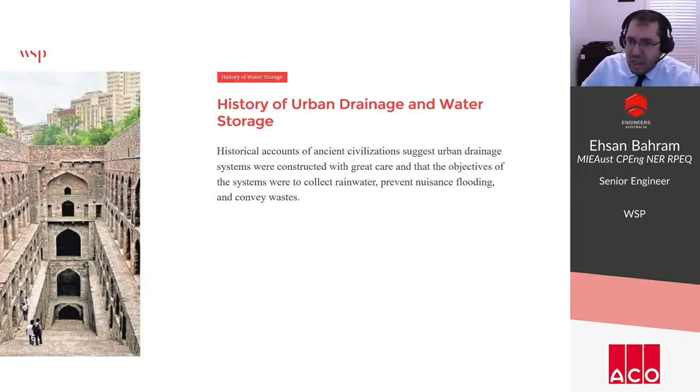History of water storage. As I was going through to get some resources for this, I was actually very amazed. We have a very long history of drainage and water storage. Lots of historical ancient civilizations developed sophisticated engineering drainage infrastructure and storage throughout history. So I'm just going to go through a couple of them quickly.

The Indus civilization in India had lots and lots of complex open channels constructed in the center of the street. The Persians, because it was an arid area, had lots of urban drainage systems as well. They actually enacted laws to protect it from pollution, which was very impressive. The Roman Empire had significant urban drainage, road drainage, and construction of large underground conduits, and they were pretty advanced on that.

The Inca terraces - this actually came from our technical director, and I didn't know about this - these civilizations in South America had these very massive terraces. They used it for land farming, but also to help against erosion, and because they received lots of rainwater there, the subsurface of the terraces was a very well planned engineering system. Just like us, for water infiltration they had soil, fine sand, gravels and medium gravels. So that was very interesting for me.

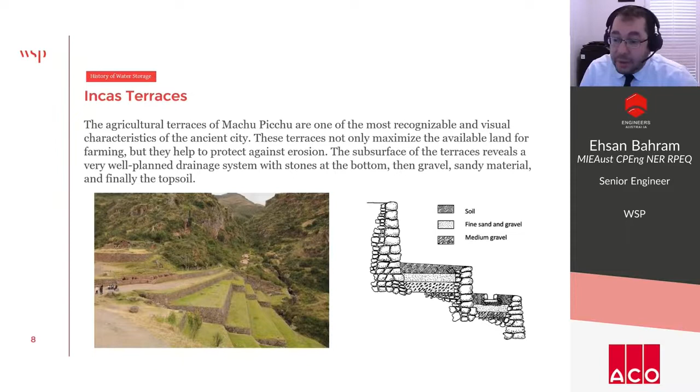So we move on to the next bit, which is the evolution of design. I just want to speak a little bit about when this was started 30, 40 years ago.

There was this pre-development versus post-development. In pre-development, with a natural catchment, we have a bit of rainfall, a bit of evaporation, a bit of runoff, and lots of infiltration. As we developed that catchment into urban development, cities, and urban infrastructure, we still receive a bit of rain, and now climate change a bit more. There is still evaporation, but as you can see, infiltration has been reduced significantly, and instead we have lots of runoff. If you look at this hydrograph, the post-development hydrograph versus the pre-development hydrograph, we can see post-development has increased significantly.

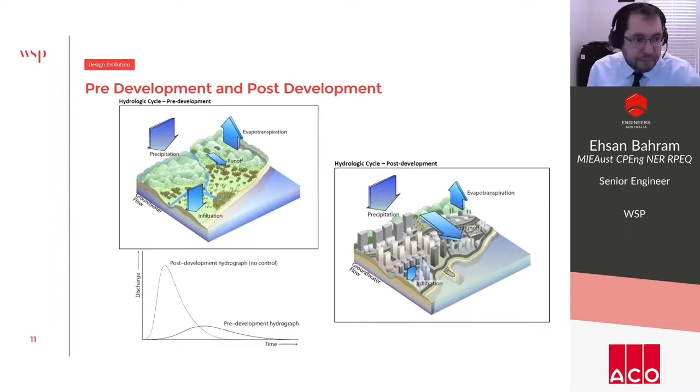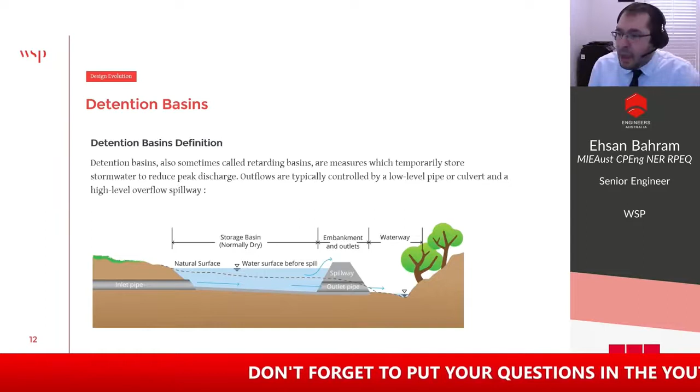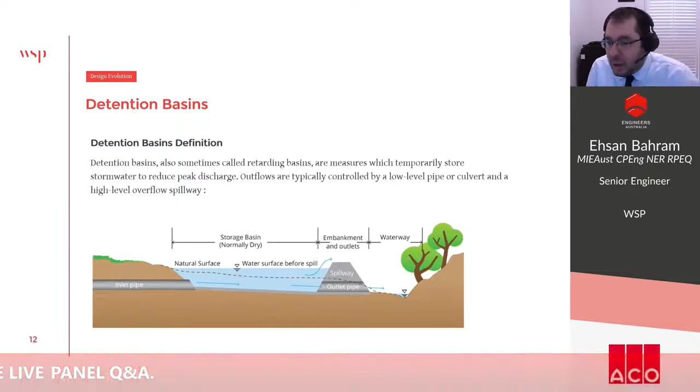To control this, we came up with a couple of ideas, and the most popular was detention basins. This definition is from the Urban Storm Drainage book: detention basins, also sometimes called retarding basins, are measures which temporarily store stormwater to reduce peak discharge. Outflows are typically controlled by a low-level pipe, orifice, or culvert, and a high-level overflow spillway for events higher than 1% AEP.

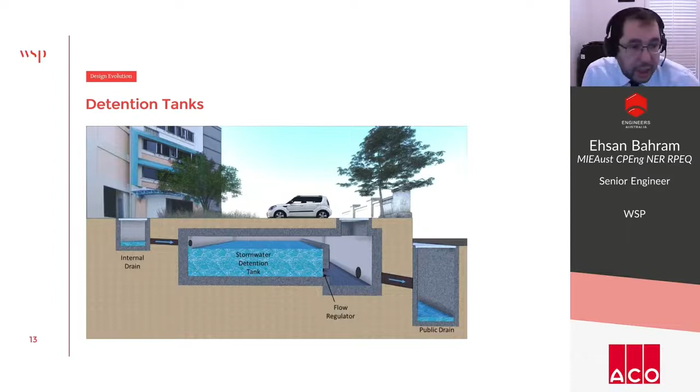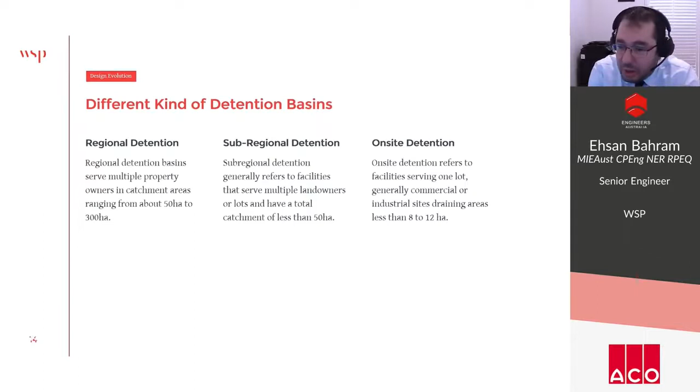And of course there are detention tanks, usually above ground or underground - both very popular, but it's just about storing that volume of water and releasing it gradually into our public drainage. Then we come to different kinds of detention basins: regional detention, which serves multiple properties; sub-regional, which has facilities that serve multiple landowners; and on-site detention, which generally serves one lot or a couple of commercial or industrial sites.

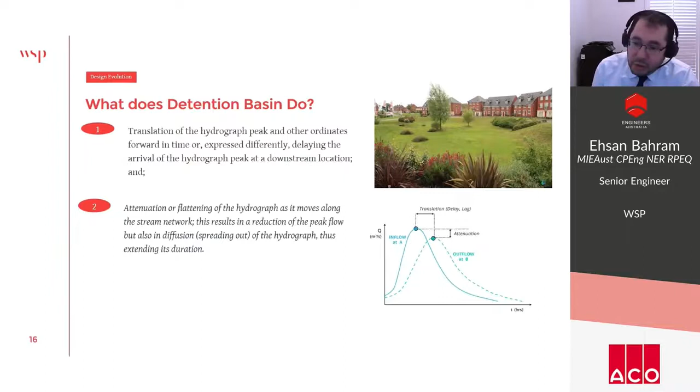So what does the detention basin do? In simple words, it reduces the peak hydrograph and it delays the hydrograph. So we are gradually releasing water in a controlled manner to reduce and delay the peak hydrograph.

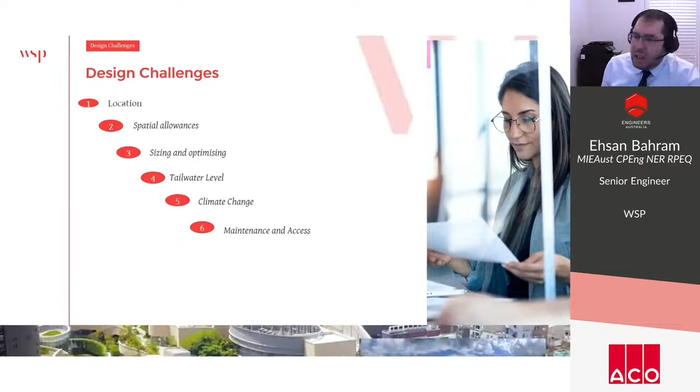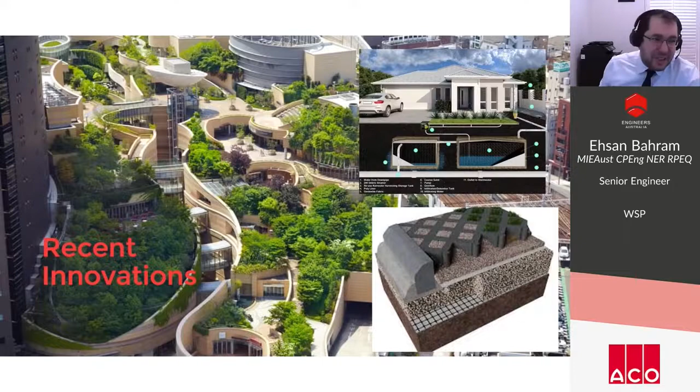Next, we needed a bit more innovation, so this is where recent innovations come into place. What do we actually want in an innovative design? We want it to be safe, environmentally friendly, we want to reduce the cost, we want it to be hydraulically efficient, easy to maintain, and of course we want to improve water quality, which is very important for us.

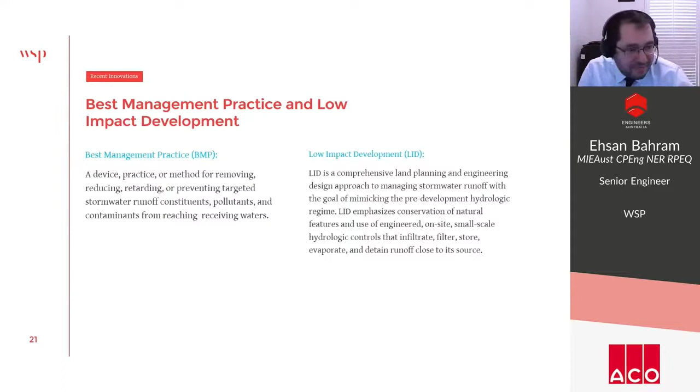Some of the key LID techniques here: conserve existing amenities. So if you have an old tree, a green area, park, land, or natural pond, we are aiming to conserve that. Minimizing impact, we try not to disturb the catchment as much as possible with cut and fill, regrading, so we just want to keep things as natural as possible.

Permeable pavement has come into picture pretty much in recent years. Green roofs, minimize directly connected impervious areas, like you probably have seen some grass buffers, grass swales, and rain gardens, of course. So these are the key low impact development techniques that we are after in terms of stormwater drainage.

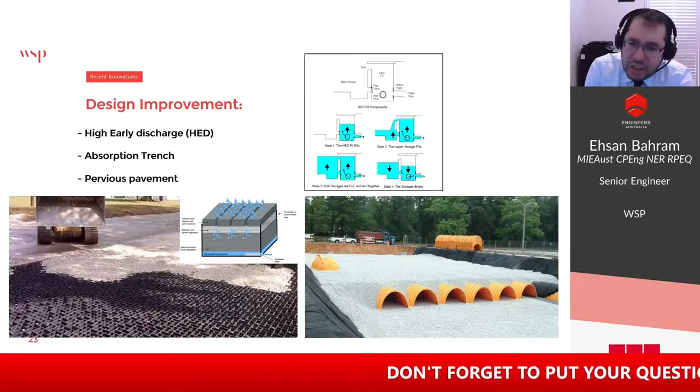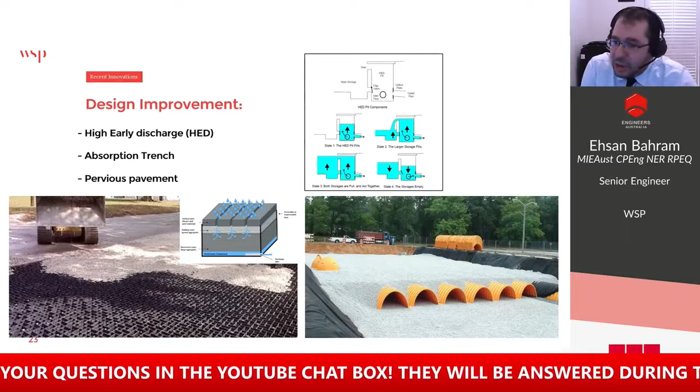There were a couple of design improvements as well. We have introduced high early discharge. That's just like a little small detention inside the detention to get that head over the orifice, so we can use the full capacity of that pipe or the orifice.

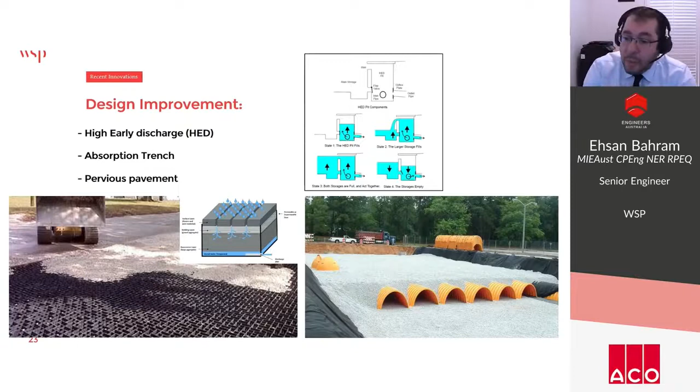Absorption trenches are now popular. Of course, you have to look for the site conditions - you can't have it on any soil, you just have to have a soil with a high permeability. Pervious pavement, again, it's a very popular technique. These all have pros and cons, so you have to analyze the site condition before incorporating them.

Geocellular models, modules, they come into picture. I'm pretty sure John will explain to us a bit in a moment. These geocellular, they're just honeycomb structures that are used to store water in urban areas.

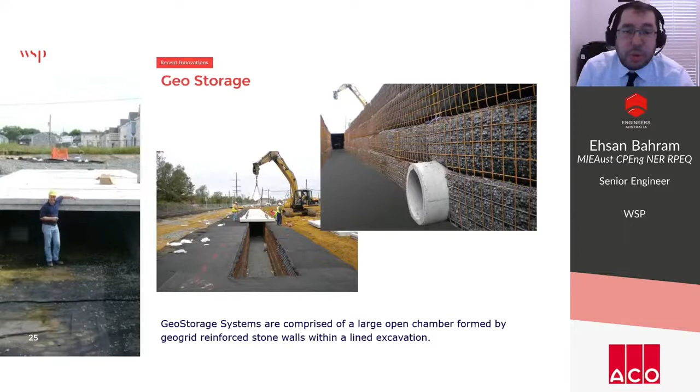We have geo-storage. That's another innovation that we had in recent years that comprises a large open chamber formed by geogrid reinforced structures. This is a good option as well because it improves water quality. So this is another option which can be used.

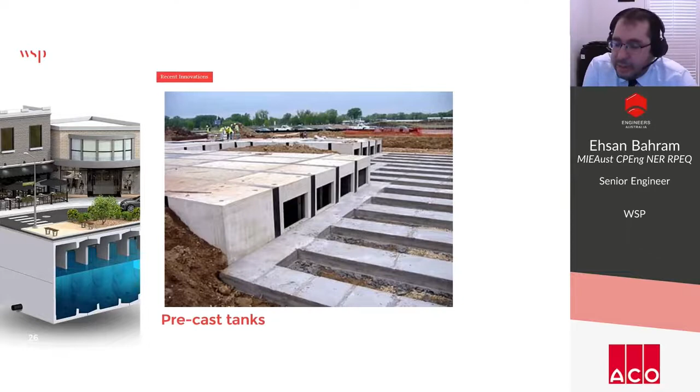And then we have these precast tanks, or they call it storm traps. When time is a constraint, these are very popular because they can install them very quickly. So this is a good option as well.

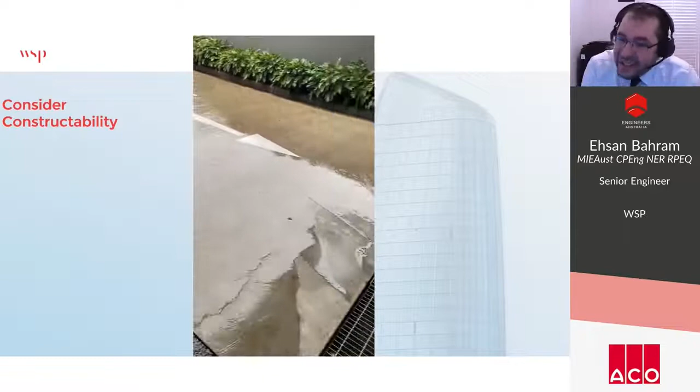What else do we have? Yeah, as we're getting toward the end of the presentation, I just wanted to share this. I took my car for the service the other day, and it was raining. This is the driveway entry to the repair shop. So if I play this, you can see that there is water coming in, and there is a grated drain here, but it's not capturing any water, right?

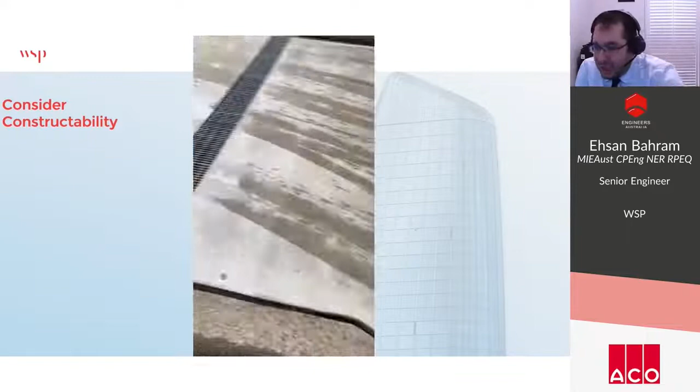So all of this I wanted to emphasize is that we need to consider constructability. What we see in the drawing is not what's happening in reality, and you can see the water escaped from this curb and gutter, and it's captured downstream somehow, but this grated drain doesn't do anything. So whenever we're doing the design, we always need to consider constructability as well.

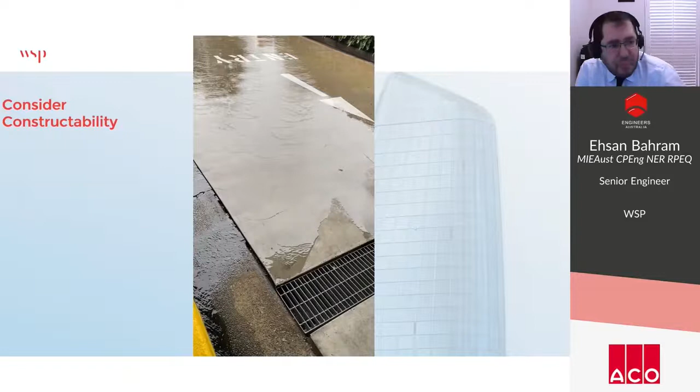So that was just an interesting thing I came across, so I just wanted to share with you.

Underground tanks are used in lots of projects as councils legislate to protect their downstream waterways and infrastructure. Managing both the quantity and quality of water being discharged off a site is only going to grow in importance, particularly as cities urbanize and rainfall events intensify as the climate changes.

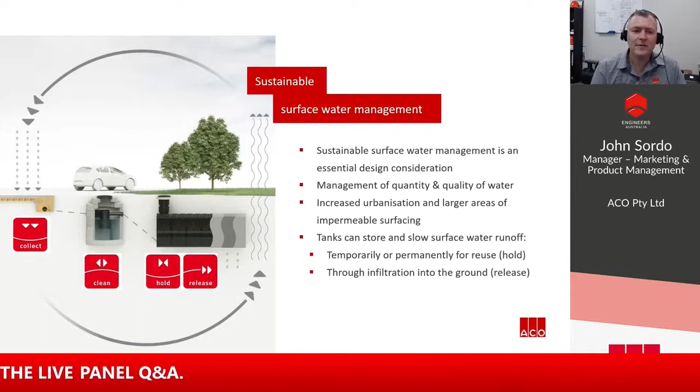These days, larger areas of the built environment are being covered by impermeable surfaces, which increases the risk of flooding. Tank solutions are a conventional way to store and slow down the surface water runoff to pre-development rates, as well as replenish the groundwater at a more natural rate.

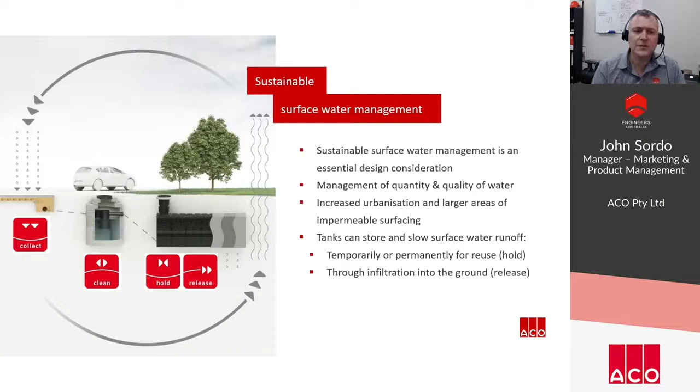These are the system elements that are designed to work with the natural water cycle. On a slab, drains are typically positioned to intercept or collect stormwater runoff, which is then treated or cleaned to prevent clogging or contamination downstream.

As you can see on the image, there are a number of tank solutions available to engineers and urban designers, both natural or engineered structures. Some of the engineered tank solutions include cast-in-place, precast concrete tanks, arches, and plastic structures. We'll focus today on just plastic stormwater tanks.

These can be easily integrated in a stormwater management plan for the infiltration, retention, or detention of surface water runoff.

Detention systems, also known as attenuation systems, are designed to spread the peak flow of a storm event. It does this by holding and releasing stormwater slowly. The idea is by controlling the runoff to reduce the risk of flooding downstream from a development.

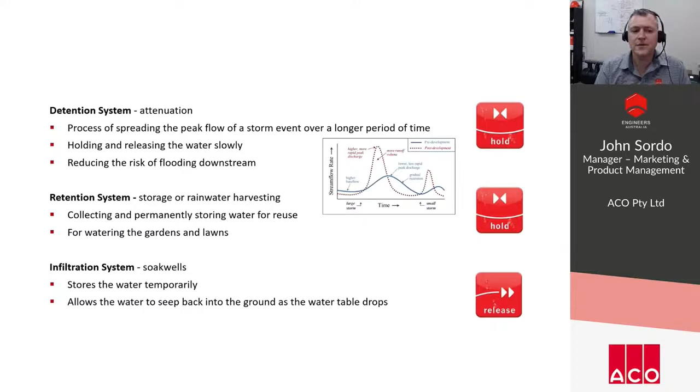A retention system collects and stores water permanently for reuse, for example, to water things like landscape areas. Infiltration systems or soak wells are used a lot in sandy areas to temporarily store water to allow it to naturally seep back into the ground to replenish a dropping water table.

To illustrate this, retention and infiltration are two common adaptations of these tanks to make best use of captured stormwater. Retention for irrigation or reuse purposes, infiltration where the soil can naturally free the water from its impurities. In both cases, the water is used at or close to the source of collection without it flowing through to any downstream infrastructure or receiving waterway.

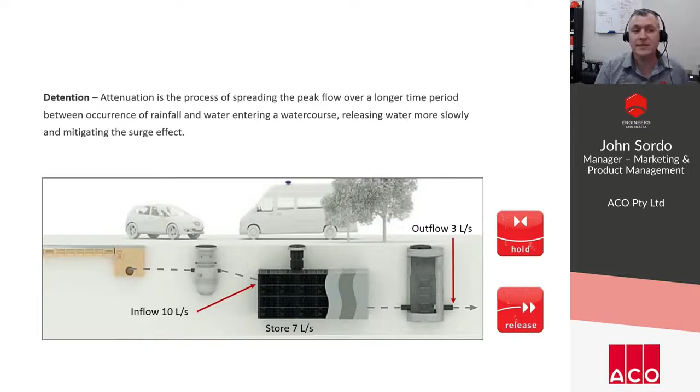But if discharging into downstream infrastructure is the objective, then detention gives designers the greatest control over the quantity of water to enter it. In very simple terms, it's an easy calculation.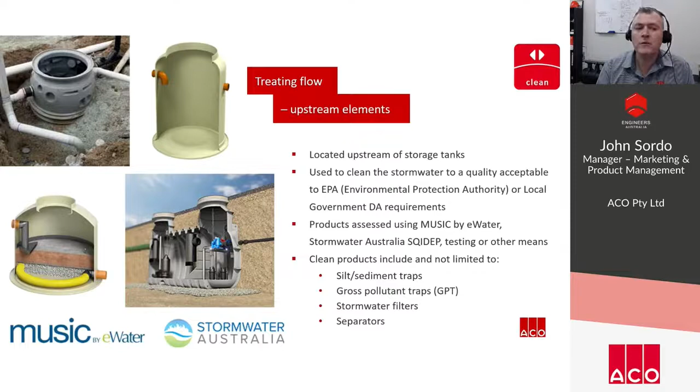Before I go on, I want to make special mention of two types of hydraulic control structures. The first are stormwater treatment devices. These are located upstream of the tank, with their performance being individually assessed and governed by the EPA and local DA requirements. Depending on project requirements, there are many types, from gross pollutant or silt traps, stormwater filters, or even light oil separators where hydrocarbons exist.

The other type of hydraulic structure are flow control devices, which control the release of water to prescribed rates downstream of the tank. These are typically installed in chambers with either purpose-designed mechanisms or just a conventional orifice plate. Now, both these hydraulic control structures are not the topic of today's presentation, but I want to mention them as they are essential elements that affect the quality and quantity of water being discharged off the site.

I want to go back to this slide to give an overview of the storage options available. From the top, we've got a detention basin. You often see these used in low to medium density areas. They tend to take up space that could otherwise be used for urban or commercial development.

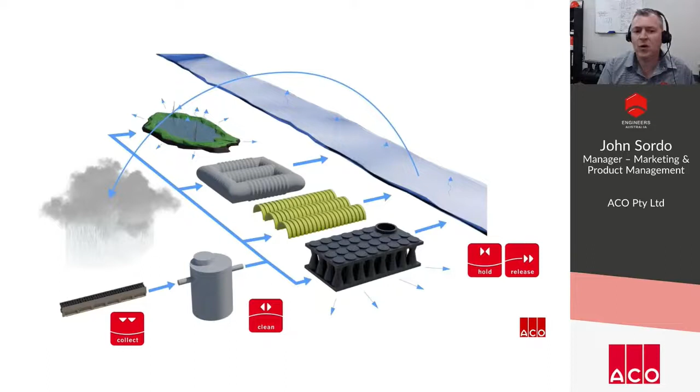Then next are concrete tanks, normally expensive to construct and transport. Next along are the plastic arch systems, which require a decent amount of space. And finally, plastic tanks. Within this large category, there's a huge range of options, with not all being equal. So today, I'm only going to focus on plastic tanks that can be assembled into producing underground cells for stormwater.

These can be adapted to a softscape where infiltration can be achieved. Here you can see them assembled, wrapped, and backfilled. They can be installed under slabs in commercial and industrial applications where space is a premium.

In fact, geocellular plastic tanks are installed in lots of projects, from car parks, driveways, in landscaped areas to commercial buildings, industrial areas, airports, and even military bases.

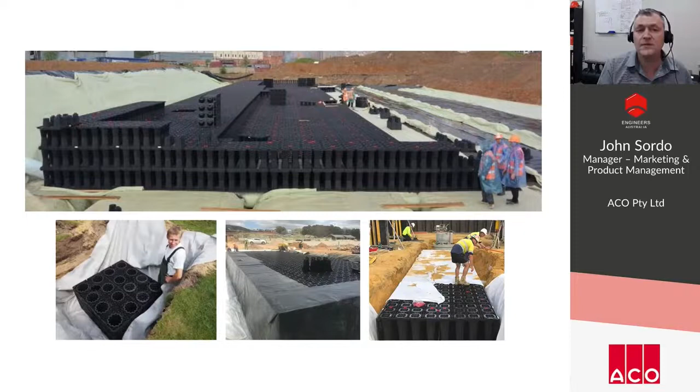In a recent installation, here is an example of a tank being used for infiltration at a school in WA. In this case, designers required a high-capacity tank to resolve a drainage problem, specifically to collect the excess surface water in a specific area of the school.

The tank was positioned, then wrapped with a purpose-built permeable geotextile. This allowed the water to gradually percolate into the water table as it was being filtered by the geotextile and then the soil.

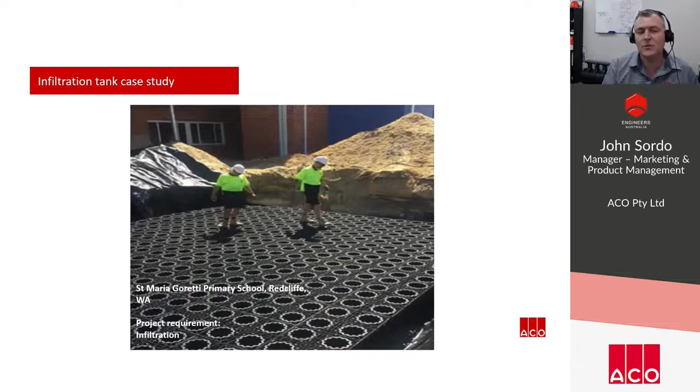In the industry, there's a wide range of options for plastic tanks. The two on the right are typical of plastic crates. The one on the left is typical of a modern geocellular unit.

I'll start with some general comments. Unlike concrete tanks, plastic tanks are versatile. They can be cut and joined, and the structure can be readily used for infiltration. Good designs have a high void ratio and can connect to large inlets and outlets that can be easily inspected. Good designs are also load rated and hold their strength over time.

But there are plastic tanks that are poorly designed, manufactured, difficult to access, monitor and maintain. And unfortunately, these give all plastic tanks a bad name. And finally, the engineer has a responsibility too. Despite the design or make of a tank, these products always run the risk of being poorly integrated in a stormwater management plan.

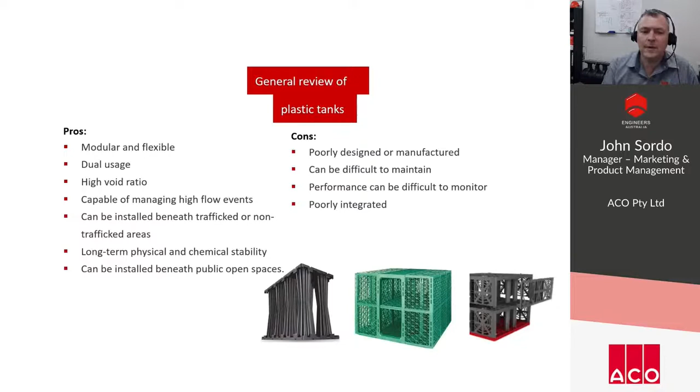So when specifying plastic tanks, there's a number of things to consider. Councils, through their development control plan, will enforce compliance to regulation. They will specify the methods an engineer needs to use to ensure the property meets the stormwater management plan. This takes into account the volume of water that the property needs to manage from the landscape, hard stands, and roof areas.

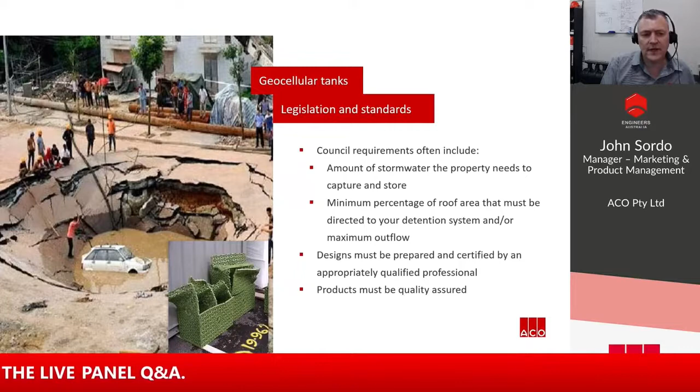Not only does the certifying engineer need to integrate the tanks properly, but as with all key stormwater products, the structures themselves need to meet minimum strength, durability, and quality requirements.

In Australia, there are no standards that govern plastic tank systems, and the problem with that is, unfortunately, some manufacturers make claims about strength and design life that just aren't substantiated.

However, there is a UK standard called CIRIA, which is specifically written around geocellular tanks. It gives guidance on testing, structural design, construction, and installation. This is the gold standard to benchmark performance, and as such, manufacturers should qualify their product to this standard to ensure that failures don't occur and a design life is maintained.

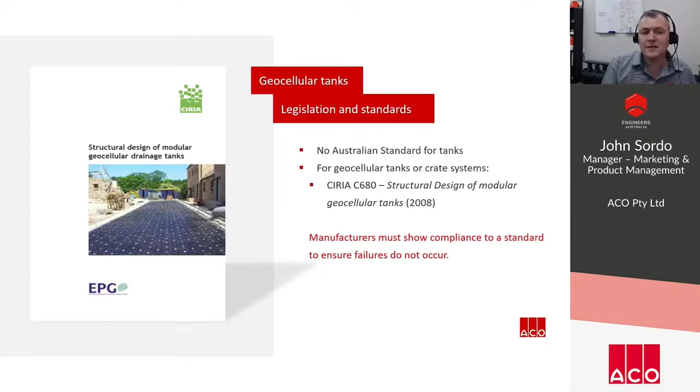We encourage you to expect compliance to this standard when dealing with a manufacturer.

A structural design should consider the load-bearing capacity of the tank. The stronger the tank, the shallower it can be buried, resulting in reduced construction costs. What determines the depth of cover required are things like soil type, tank design capacities, groundwater level, pavement thickness, and design loads. CIRIA identifies these as the main factors overlooked that contribute to failures.

And manufacturers must be able to come clean on their strength data, prove it with independent testing. To address this, CIRIA have detailed all the requirements for laboratory strength testing.

And when considering loads, both short and long-term loads must be addressed. Dead loads include the mass of soil surrounding the structure, plus the weight of slabs or anything else permanent that a tank will be subjected to. Live loads are temporary loads like vehicles, which also need to be considered.

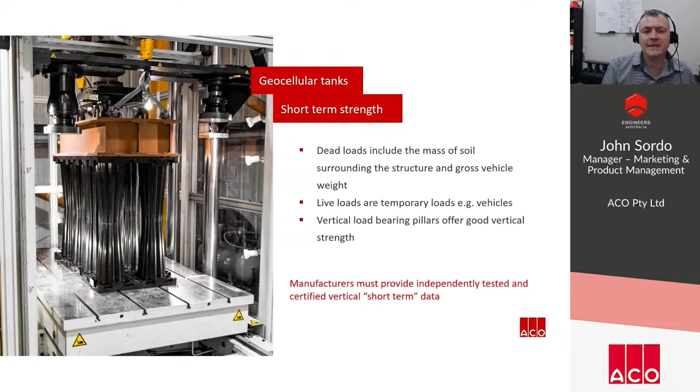Tanks that have vertically aligned load-bearing pillars offer a fairly decent vertical strength and stability, and manufacturers should be able to provide you with independently tested vertical load results.

Lateral loading is as important as vertical loading and takes into account soil mechanics. This is a key driver to how deep a tank can be installed. Be aware that specifically in high water table applications, tanks can be pushed out of the ground. So in these instances, either locate the tank close to the surface to avoid the water table, or locate the tank beneath a heavy pavement to anchor it down.

Also, great emphasis should be placed on the jointing methods. Systems that use a combination of cross and brick bonding allow for a more rigid tank construction. Again, manufacturers should provide independently tested and certified lateral load data. This is to justify the installation depths that they recommend for your project.

To illustrate to you that plastic tanks in the industry can vary in strength, our office in the US ran some comparative testing. And if you enjoy, like me, seeing structures getting destroyed, you'll like this video. Note some of these products are now sold in Australia.

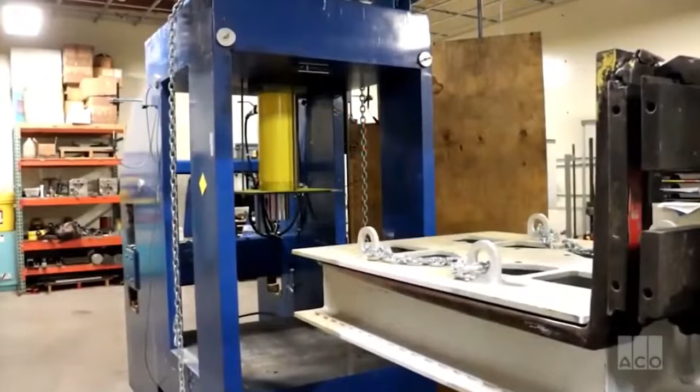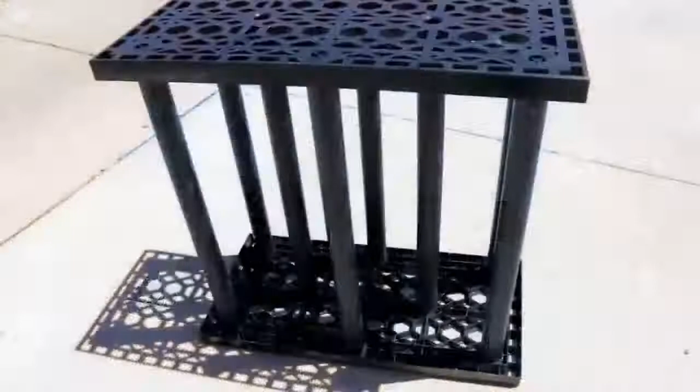We've independently tested 7 products to destruction in both vertical and lateral planes on 2 different test rigs due to size constraints. These tests allow us to simulate a static load and a dynamic load. We are testing ACO StormBrixx HD, ACO StormBrixx SD, Graf EcoBloc, Brentwood Storm Tank, Oldcastle CUDO, Eco Rain Tank, and ACF R Tank HD.

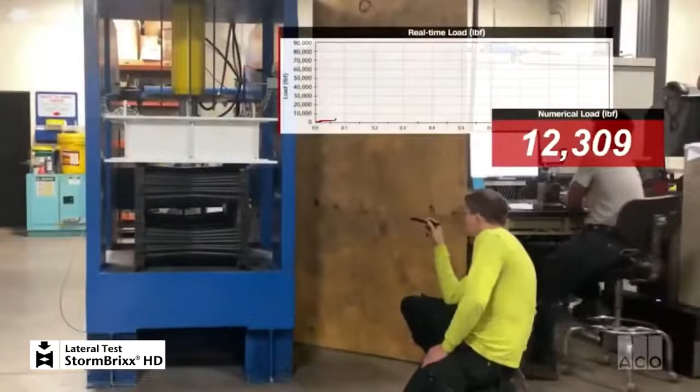We see the failure mode of the StormBrixx HD system at a maximum load of 86,784 pounds. We see the lateral failure mode of the StormBrixx HD system with a maximum load of 16,424 pounds.

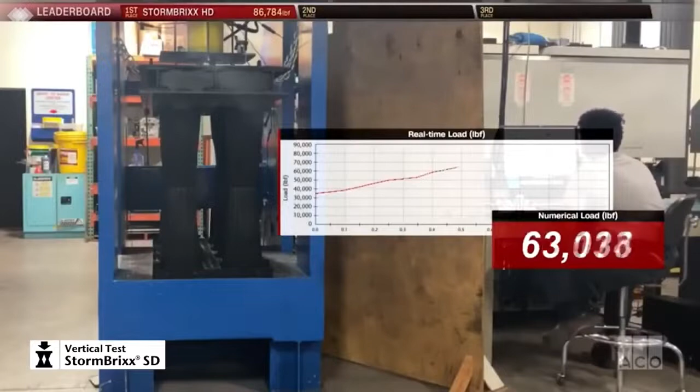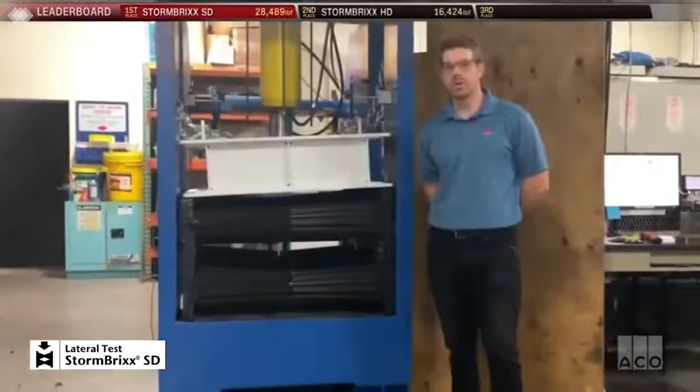We see the failure mode of the StormBrixx SD system with a maximum load of 72,291 pounds. We see the lateral failure mode of the StormBrixx SD system with a maximum load of 28,489 pounds.

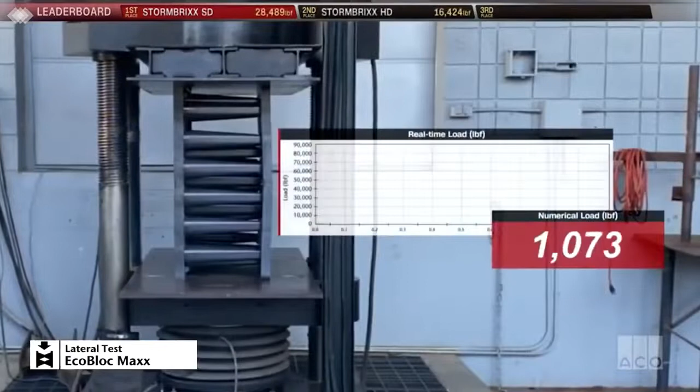We see the failure mode of the Graf EcoBloc system at a maximum load of 59,728 pounds. We see the lateral failure mode of the Graf EcoBloc system with a maximum load of 5,514 pounds.

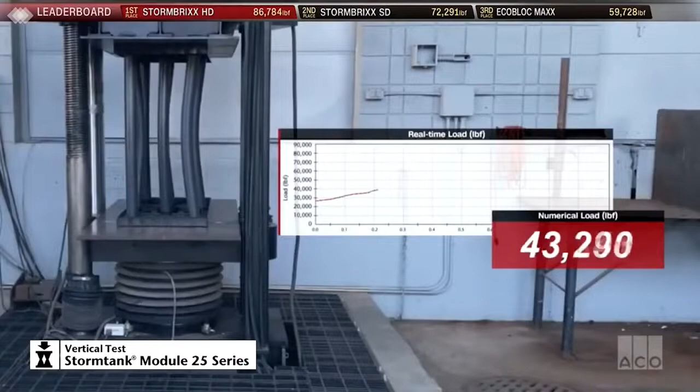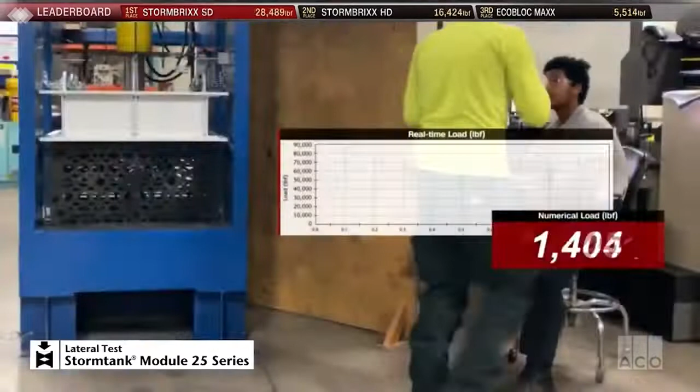We see the failure mode of the Storm Tank system with a maximum load of 48,503 pounds. We see the lateral failure mode of the Brentwood Storm Tank system at a maximum load of 14,545 pounds.

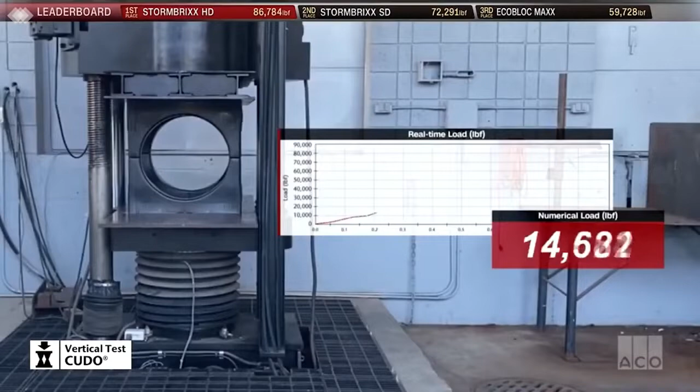We see the failure mode of the Cudo Cube system with a maximum load of 19,195 pounds. We see the lateral failure mode of the Cudo Cube system with a maximum load of 2,956 pounds.

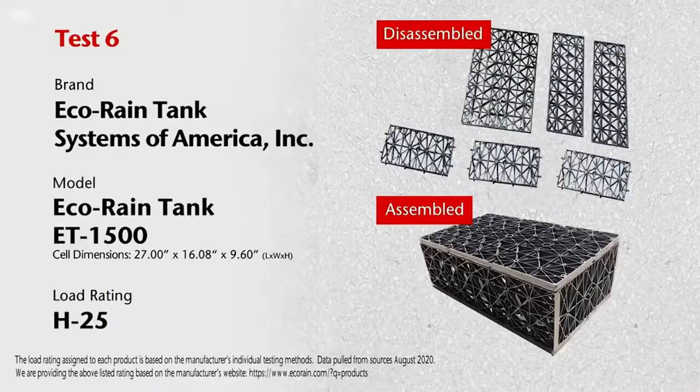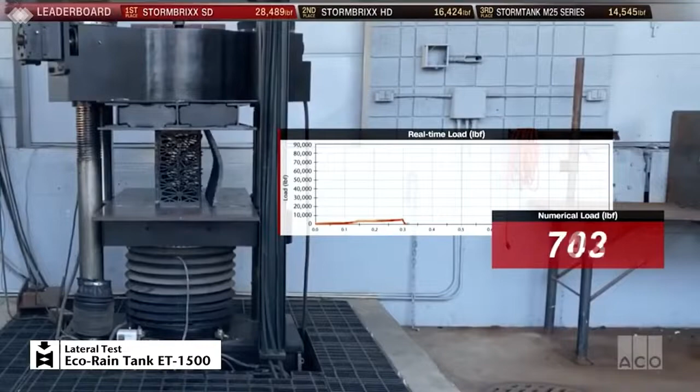We see the failure mode of the Eco Rain Tank system with a maximum load of 7,469 pounds. We see a lateral failure mode of the Eco Rain system with a maximum load of 5,747 pounds.

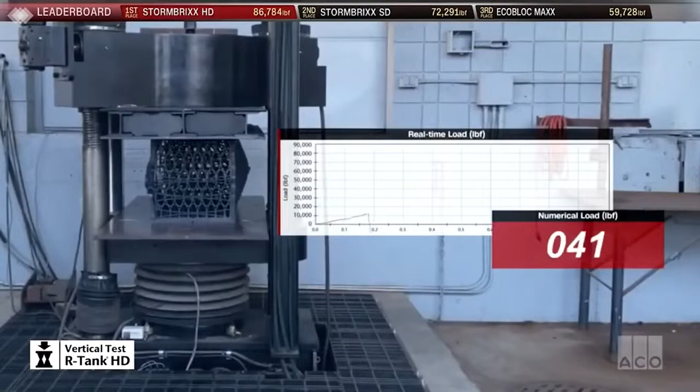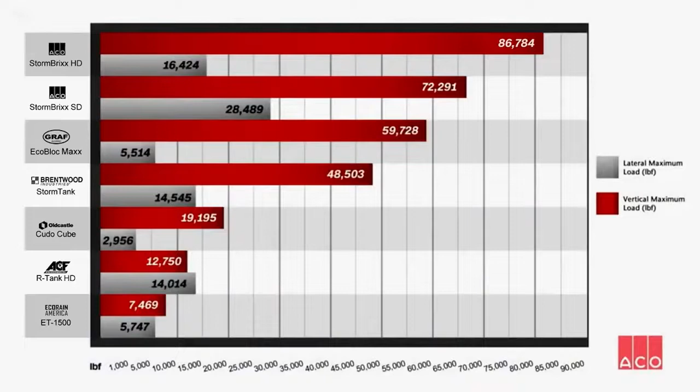We see the failure mode of the R-Tank system with a maximum load of 12,750 pounds. We see the lateral failure mode of the R-Tank system with a maximum load of 14,014 pounds. ACO StormBrixx systems outperform all others in both vertical and lateral testing. We hope you keep these results in mind when specifying your next geocellular stormwater storage system.

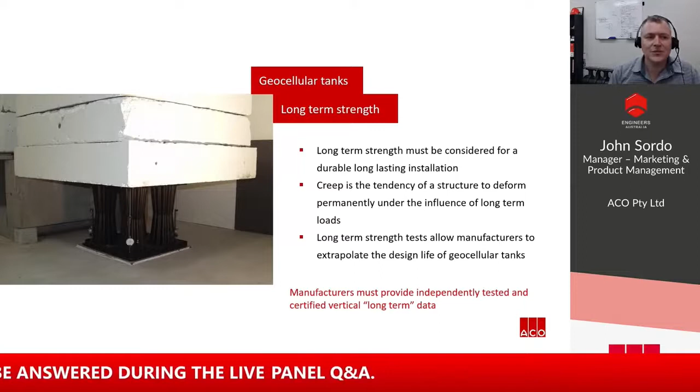This is crucial for a durable installation. Tank materials are liable to creep, meaning they deform over time, and products must be strong enough to withstand this. The long-term strength test data allows manufacturers to determine the design life of their tanks. Not appreciating long-term strength can have extreme consequences. This is an example of an installation where the tank has failed because of creep. It's really everyone's nightmare and just highlights the importance of long-term strength.

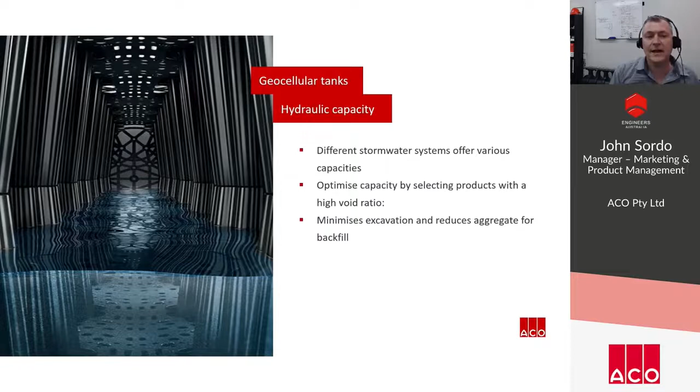For tanks, the hydraulic capacity refers directly to the volume of water that the structure can store, and different tanks in the industry will, of course, offer different capacities. You can optimize the capacity of the tank by selecting products with high void ratios, which is over 90% for geocellular systems. Having such a high void ratio reduces excavation and obviously the construction costs because of that.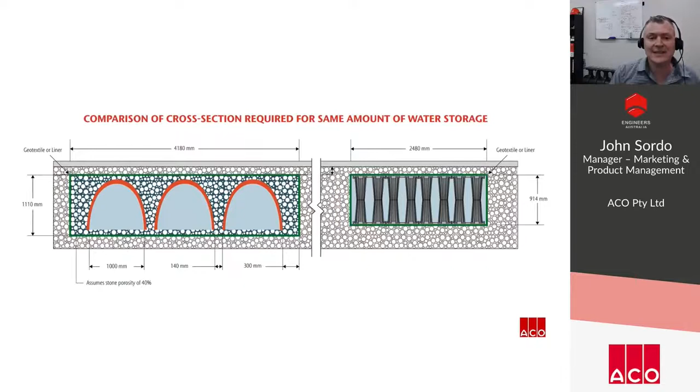As another comparison, let's look at concrete structures. Although concrete tanks provide 100% water storage inside the tank, they do have thick walls, which reduces the void ratio to around 80%. And they're expensive to build and install. In comparison, geocellular tanks are more economical while still providing a high amount of storage.

For concrete pipes, they're obviously round, but they need square trenches. Each pipe needs to have 250 millimeters of sand or stone bedding and around half a meter spacing between each run. All of this increases the excavation required and means more fill, making the installation bigger and more expensive. A good manufacturer should be able to help you optimize the space while helping you meet the storage volume requirements of the project.

A tank versatile enough to shape itself around your project will give you more options to meet a site's storage requirements. Modular tanks offer the ability to adapt themselves to an underground space with some level of flexibility. This is particularly useful when avoiding things like existing services, buildings, or footings.

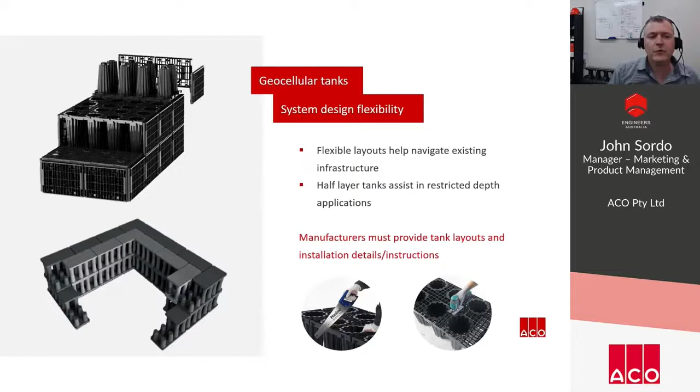Manufacturers should give you tank layouts to help you navigate the physical constraints of your project, as well as clear installation instructions. As mentioned earlier, tanks can perform any or a combination of these roles, and depending on how a tank is used, it requires a different type of wrapping.

In non-sensitive retention or detention applications, geomembranes are used as the bladder for storing water, along with the geotextile on the outside to protect it. As long as minor leakages from the tank can be tolerated, the membrane is normally just taped together. This is used in the vast majority of applications.

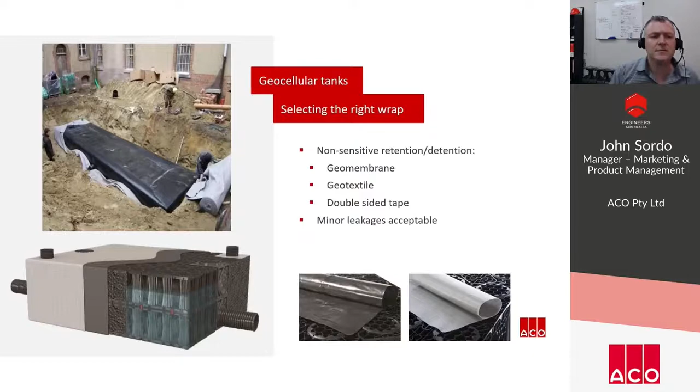But for sensitive applications, like a tank positioned close to a building or to simply contain contaminated runoff, we'd recommend using a welded geomembrane installed by an accredited contractor. This ensures water tightness. But as before, the geotextile wrapping on the outside only needs to be taped. The focus in this instance is on the integrity of the membrane.

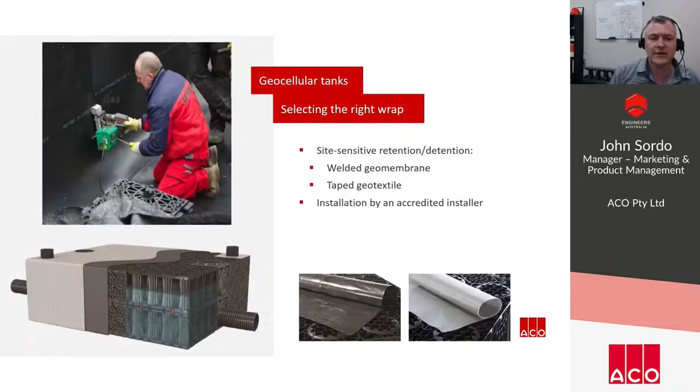And for infiltration systems, there's no membrane used, just the geotextile, which acts to minimize the sediment buildup within the tank while allowing the water to percolate.

Stormwater tanks can be very large, and moving them to site and then into the excavation can be costly. Geocellular plastic tanks are lightweight to transport, and the modules are designed to stack inside one another, which means they take up significantly less space compared with other products. This leads to fewer trucks to site and fewer trips to the excavation. Not only is this more cost effective, but better for the environment.

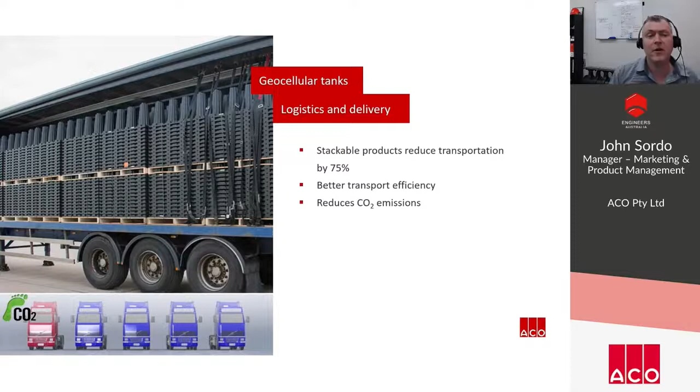The site itself should be considered when selecting a product. The time it takes to store and assemble these tanks can significantly affect construction costs. Some tanks need storage, and worse still, some tanks simply don't stack.

Some plastic crate systems are generally assembled away from the excavation, then lowered into it. There are additional rent and labour costs associated with building and storing the tanks before the installation. Geocellular stackable tanks, however, are really beneficial for sites with restricted space or labour, in that they can be built directly inside the excavation.

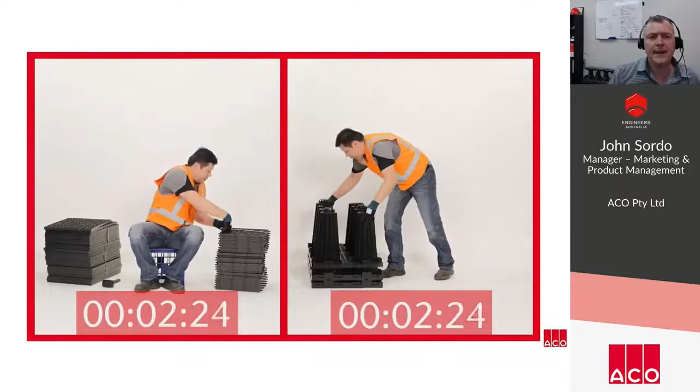This video shows the speed of these tanks compared with a traditional crate system. On the right, Darren is building a geocellular unit using a brick bonding method, and on the left, he's assembling a flat pack crate. You'll see that the geocell has 3 times the volume capacity of a double crate system. So crate systems have substantially less capacity and take more time to assemble.

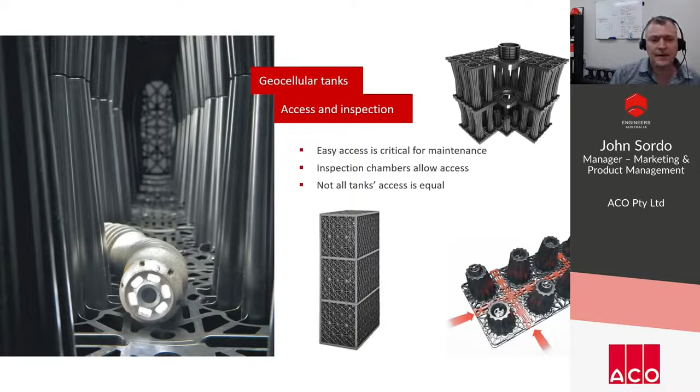To get access to a tank, a dedicated entry point for both inspection and cleaning is needed, like the inspection chamber shown on the top right of the slide. For inspection and maintenance, open cellular tanks provide uninterrupted access from one cell to the next. This is in stark contrast to the closed-in structures of traditional crate systems. A tank that can't be maintained actually serves no purpose at all. Cameras and jets must be allowed to pass throughout without restriction.

Here is a short video showing how a camera was used to inspect a geocellular tank under a pedestrian precinct.

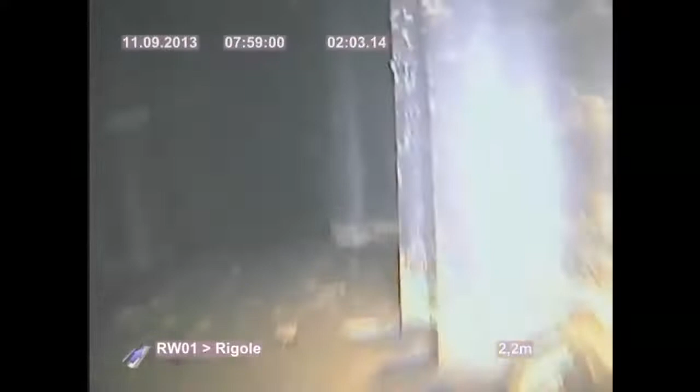You can see the camera move through the system easily without being restricted by any physical barriers of the tank. On the bottom left, you'll notice a chainage counter showing the distance travelled by the camera cable from the manhole.

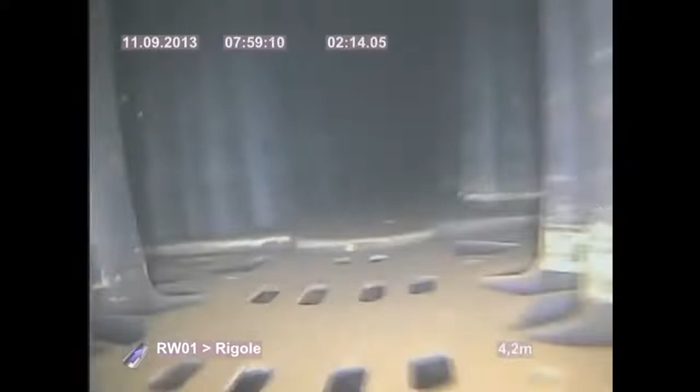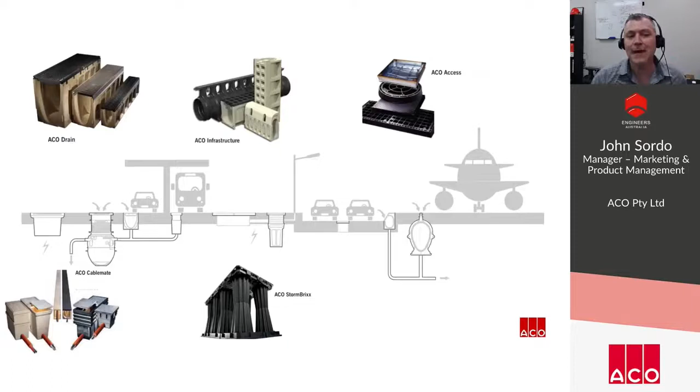We have two versions, SD for vehicles up to 9 tonnes and HD up to 30 tonnes. Details of this product range can be found at

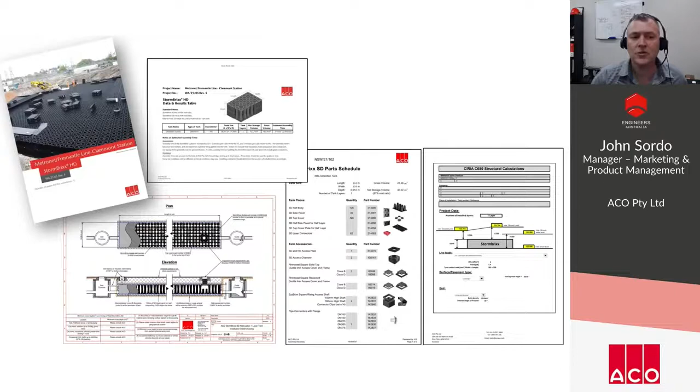acostormbrixx.com.au. In terms of product support, we can offer you a personalised service to help you optimise your tanks for your specific projects. This involves us configuring the tank and providing you with a part schedule for that configuration. We can also provide you with structural calculations to help in your design to CIRIA C680.